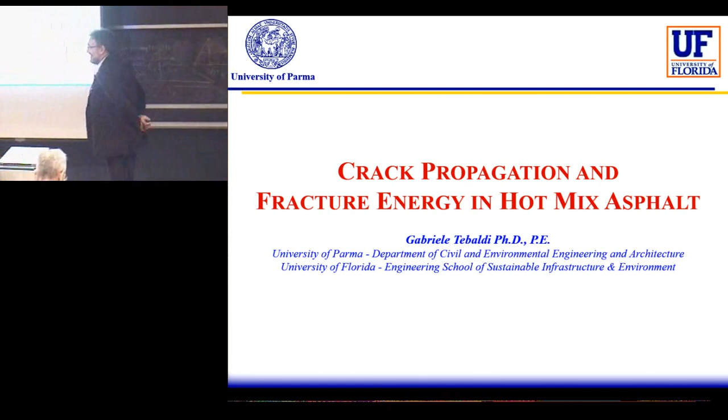Let me start from what, thank you, very thank you. I remember coming here, I was remembering myself 14 years ago, young, with a terrible English at the limit of the capability to be understood. And yeah, it's not a good English anymore, but I try to survive a little bit better. But it was a long journey from that day, and I have really to thank you for the chance that you gave me to start my international career. And yeah, it was always a piece of my heart. I would like to start by thanking you.

Okay, let me acknowledge all the people that were involved in this series of projects that was based on the application of the HMA Fracture Mechanics theory developed at the University of Florida, to understand crack initiation and crack propagation in asphalt mixture. First of all, the 2 persons that was behind the theory, Professor Reinaldo Roque and Professor Björn Birgisson, that is another piece of the connection in this small village that is the world. I met Björn in Florida, but I know that he came from here. Dr. Elena Romeo, my former PhD student that spent a lot of his time working on that. Professor Riccardo Roncella, the person behind the DIC method that we developed. Dr. Jian Zhu, Dr. Marco Isola, and my master student Simone Musetti, who were involved in several steps of this long work.

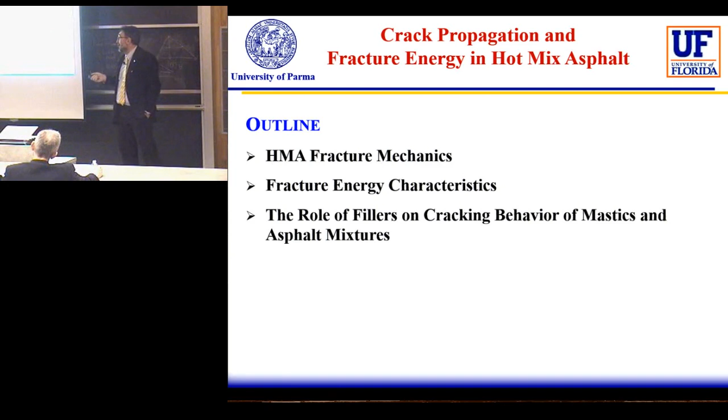Now, today, I will talk about the basic concept of the HMA Fracture Mechanics, a theory and theoretical approach defined by Roque and Sankar almost 20 years ago, and the work that we did to define the fracture energy characteristics from the experimental point of view in different parts of the material, and what is the role of the filler. Filler is one of the components of the skeleton of the aggregate part that composes the HMA, the mixture.

So let's start with the background of HMA fracture mechanics. The basic principle of this theory is the assumption that in asphalt mixtures, creep is damage, a way to dissipate energy and make damage in the material. The second basic principle is that a damage threshold exists. What does it mean? It means that if the strain energy stays below the energy threshold, no failure happens in the material. So micro cracks develop, but due to the property of healing that the material has, which is something not yet very well defined, it is a property due to the thermal susceptibility of the bitumen that allows the material to close and diffuse in the micro crack and realize a real healing effect.

So in the basic concept, if you are below the energy threshold, the healing is able to seal the micro crack. If the strain energy goes above the energy threshold, the healing is not able to heal the cracking, and we have damage - a not healable macro crack.

Following this approach, we can define the micro crack when we are below the threshold and the macro crack when we are above the threshold. We can see this as not visible and visible from another point of view.

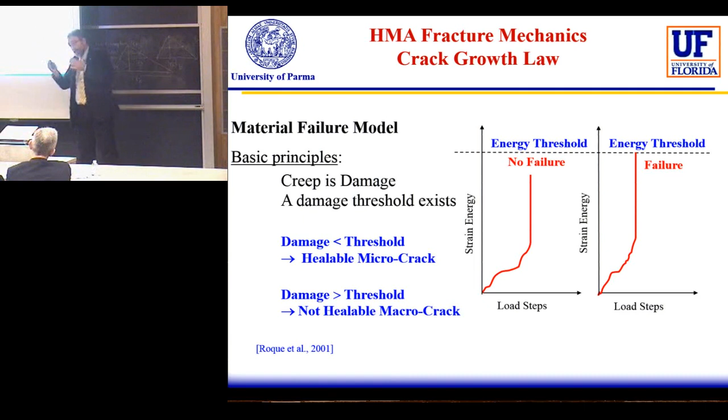So following this approach, we can define two different thresholds: one named dissipated creep strain energy, and one that is the total fracture energy. Dissipated creep strain energy is the energy dissipated by the creep of the material.

You apply load, the material starts to dissipate energy, and if the micro cracks make some kind of coalescence and go up, you have the first crack that appears in the material. If the energy is below, you have nothing, and the micro crack can be healed.

But if you have one pass, one load that involves the elastic part of the behavior of the material, you can go up over the other threshold, and again you can have a not healable crack.

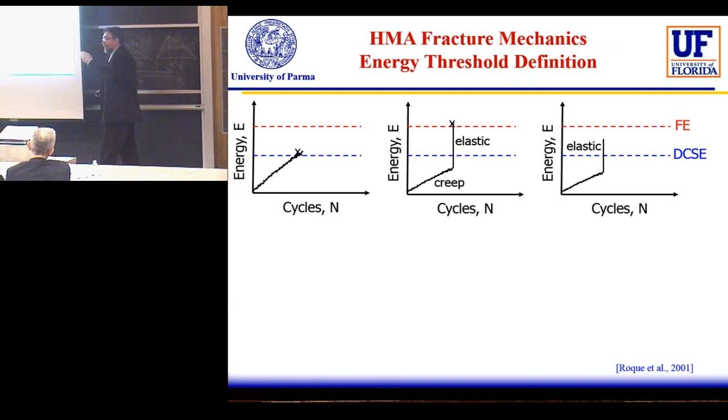But if you stay below the dissipated creep strain energy and below the total fracture energy, you have no cracking that appears. So you have some micro cracks, but the healing property of the material can seal, or let's say repair, the material.

So what we can do is, in the normal service life of the pavement, we have the potential for this: in one day you have damage that appears, but if the pavement is correctly designed and the strain energy is not too much, when the car and the load are not applied, the material has time to be healed. So we have healing, and the material starts again and again and again.

So if we are doing the right job in the design phase, we can keep the damage below the critical threshold.

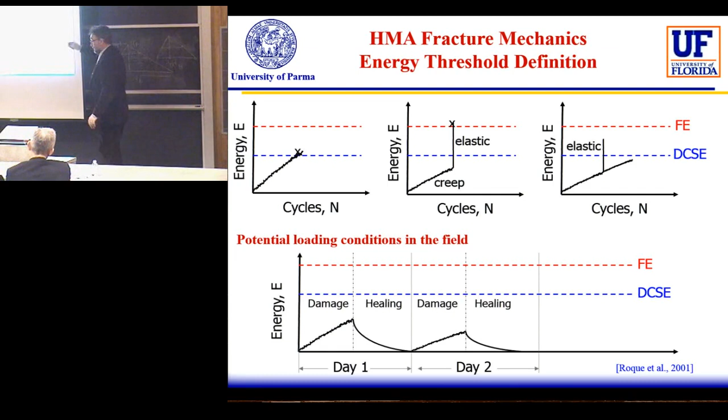So we can define, following what I just explained, the total fracture energy as the combination of the creep plus the elastic part of the energy - something like the area below the stress and strain curve, considering the stress and strain curve until the first fracture.

When the first fracture appears, it means that in that area of the material, the threshold was overcome. And from the fracture energy, using the elastic property, resilient modulus could be a way to estimate the elastic property, or some other prediction.

So in some way, if you are able to have an estimation of the elastic property, we can take out the elastic component in the stress and strain curve, and we can define the dissipated creep strain energy as this remaining area.

Everything was calculated following the Superpave IDT procedure, that is based on the IDT test, in a series of three different tests carried out on the same specimen, applying load and measuring vertical and horizontal deformation. We have the resilient modulus with cyclic load application, the creep with static constant load over time, and after that the strength, increasing the load until failure in a strain-controlled test.

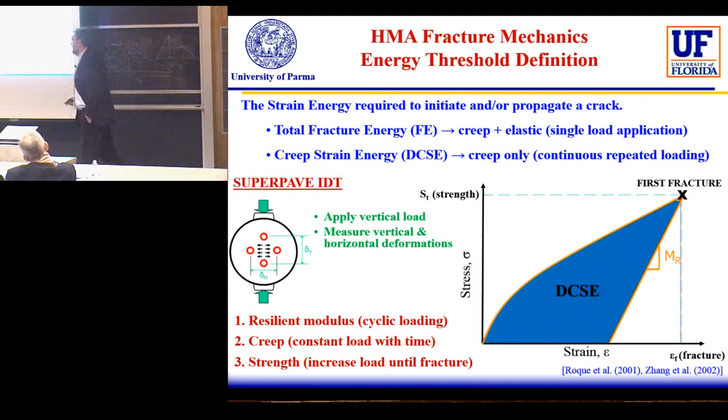Again, looking at the traditional approach of crack propagation, that is the Paris law, we can have an interpretation of this phenomenon from the point of view of HMA fracture mechanics, considering a propagation step by step in the material.

So if you have your material and somewhere in the material location the threshold is reached, you have the macro crack initiation. Again, from there starts some micro crack, and as soon as we reach the different threshold, we have a coalescence of the crack that develops the crack in the material.

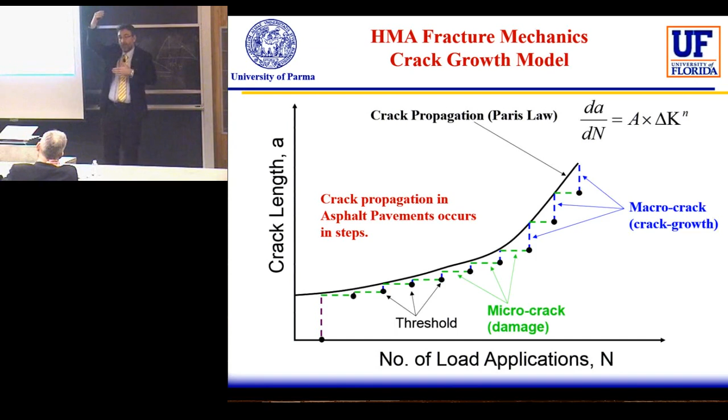The last topic: how was it possible to define the point where the first crack appeared? At that time, the DIC method was still not developed.

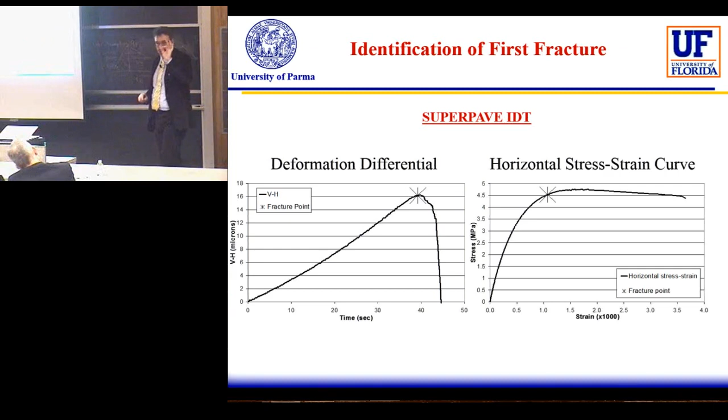Now let me go into the part where I was most involved, which is the definition of the different characteristics of the fracture energy. So what I call characteristics of the fracture energy is that we were able to verify that the fracture energy, defined following the HMA fracture mechanics, is constant in the material. We were able to calculate, thanks to the DIC approach, the fracture energy at different points where the crack started, and we found the same level of fracture energy at different points of the material.

We were able to show that this approach was independent from the specimen geometry and not affected by the polymer modification. For those not in the field of asphalt pavement, the bitumen, the black part of the asphalt, could be natural bitumen or the so-called polymer modified bitumen. This is a technique that allows adding polymer inside the bitumen to improve the elastic behavior and also the strength of the material.

So the hypothesis was that changing the internal property of the binder could change the general behavior of the material, and maybe the approach and basic hypothesis must be adapted to this internal change. We were able to show that the hypothesis was still valid even with the change in the fundamental property of the material.

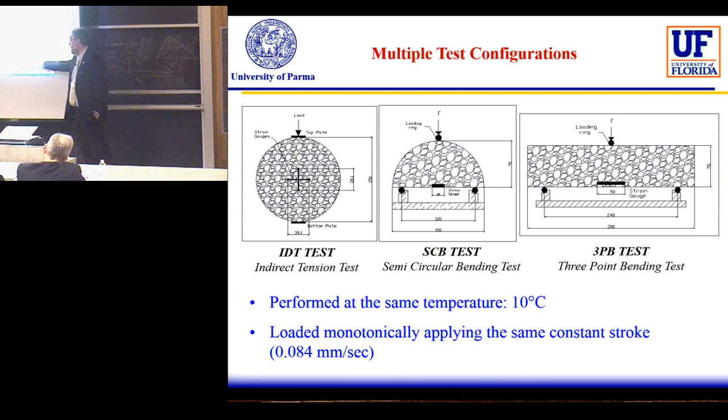And the load in all the tests was monotonically applied at the same constant stroke rate of 0.084 millimeters per second.

This was the information about the material: same aggregate type gradation, limestone, calcarenite, sand with 12.5 millimeter nominal maximum size to define the aggregate size, and three different asphalt binders - two different unmodified bitumens, and an SBS modified one, with 6.5% SBS linear polymer modified bitumen using one of the two unmodified bitumens as a base.

Why two unmodified, the so-called natural bitumens? Because bitumen is strongly dependent on the crude oil that is its origin. You probably never considered that bitumen is part of a big recycling operation in the world, because to produce gasoline, the residual part of the refinery plant is the bitumen.

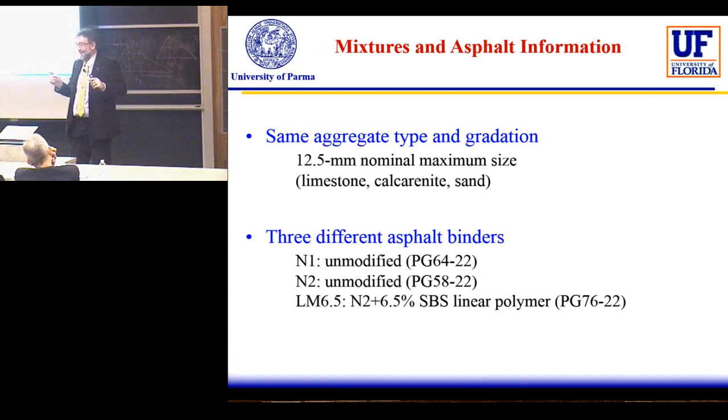So, to be more flexible in the evaluation, it was necessary to go beyond the traditional technique used to measure vertical and horizontal strain. The limitation of the strain gauge or clip gauge is that they don't provide a pointwise analysis - it's defined from the beginning where you are taking your measurement, and it's not possible to be flexible.

So if something happens where you measure, you are lucky; otherwise, you have to do the test another time with another hypothesis. And so it's not possible to do some kind of back analysis - to identify the critical point and do all your calculation at that specific critical point. It was, and still is, difficult with that technique to have a full field displacement and strain measurement in the specimen. So we have something local, just related to the point where the clip gauges are fixed.

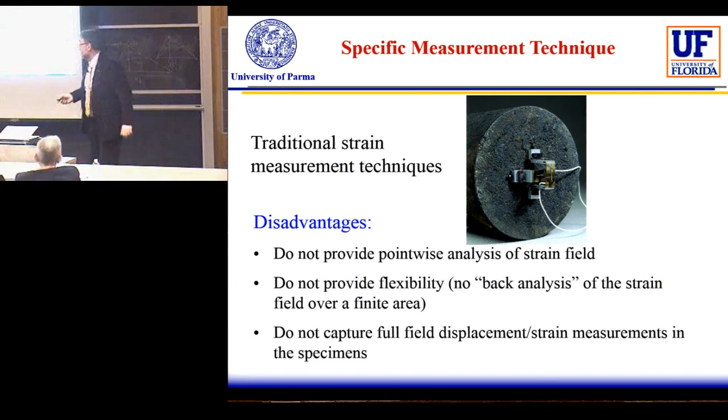For that purpose, a DIC method was specifically developed based on grayscale analysis. The basic concept is that one pixel with one specific level of grayscale, if the area of interest is sufficiently small, and if we find the same grayscale in two pictures, we can make the hypothesis that it's the same pixel that changed position. Of course, the more you increase the area, the higher the probability of finding similar grayscale, and the accuracy of your measurement goes down.

The system was very simple, based on a digital camera with a couple of lights in order to take out any kind of shadow. At the time it was not so easy to find cold light, because the risk is to increase the temperature of the surface and make some kind of alteration of the real property of the material.

And to have the right contrast, in this case a soft white water paint was used, and some random black dots in order to maximize the contrast in terms of the grayscale. If you have other material, not black like asphalt, maybe you can do without this particular technique.

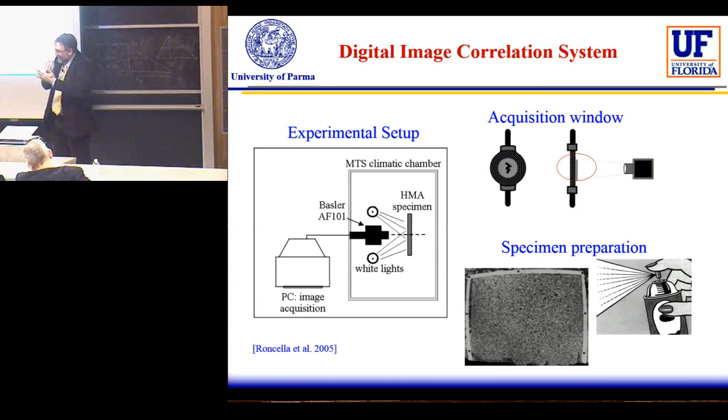Now it's simple, but I have to tell you a secret: at the very beginning we spent some months measuring the fracture energy of the paint, because we were too concerned about the fact that the paint has to be completely attached to the material, and we were not considering the strength of the paint itself. So we spent a lot of time with strange results, and we realized that at the end it was the fracture energy of the paint. But this was something that happened.

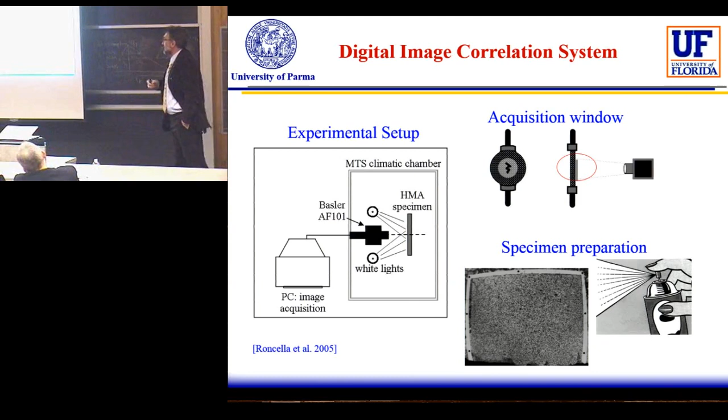So the first step was to verify the hypothesis that the HMA fracture mechanics, the fracture energy in agreement with HMA fracture mechanics, is constant in the material.

For that purpose it was fundamental to have the DIC, because we took pictures of the specimen during the test, and we made the calculation of the stress and strain curve and the fracture energy at the point where we know the crack will appear. Because we know where the crack appears, coming back in the picture, we can identify the point and make all the calculation.

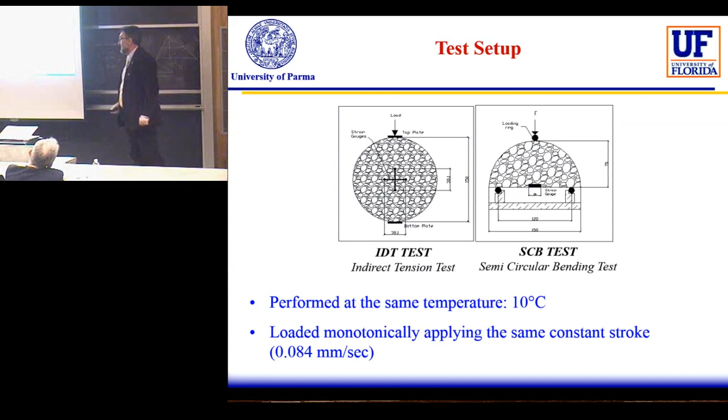For that purpose two different test setups were used: the IDT test setup and the semicircular bending beam test setup, again the same conditions that I showed before.

The strain analysis was made using the strain gauge in the back of the specimen and the DIC in the front. It was necessary at that time to have two different measurement techniques.

In particular, this was used as proof that the DIC method was giving us the right strain field, because we were at the very beginning - I'm talking about, I think, 2005. At that time the use of DIC was not common, so a lot of people were concerned about the real capability of that method to give us the strain field.

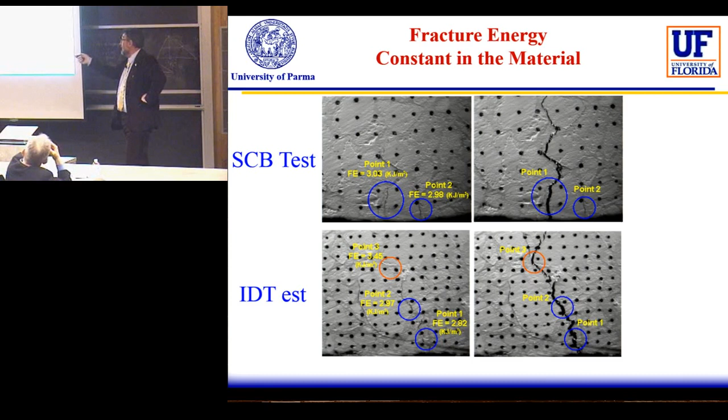And we found a very good agreement with the fracture energy calculated at the different points. So, using that result, we were able to show that it is a constant of the material, independent from the location of the crack and from the stress distribution behind the crack initiation.

The second step is to verify that fracture energy is independent of the specimen geometry, so independent of the stress field behind the crack initiation, and that it was not affected by this big change in the mechanical performance of the material, because bitumen is a viscoelastic material, but adding polymer, we increase a lot the elastic part, so we are changing the mechanical behavior.

So it was not so clear that the change was not affecting the hypothesis of the HMA fracture mechanics, and the other hypothesis that can be used to predict the crack initiation.

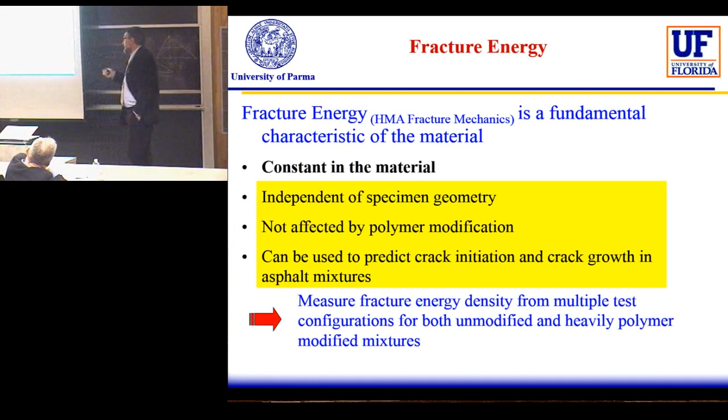Again, we did the test in different configurations for both kinds of bitumen, and here I will show you some of the results.

Again, double way: the strain gauge in the back and DIC in the front, and we found quite nice correlation in terms of first crack. Of course it was not in full agreement because we are looking at both sides - it's not a three-dimensional analysis - and something that can happen on one face is not exactly at the same time on the other, but considering that the thickness of the specimen is 5 centimeters, it's possible to assume that the time difference does not make a big change.

So what's happening on one face follows closely what's happening on the other one.

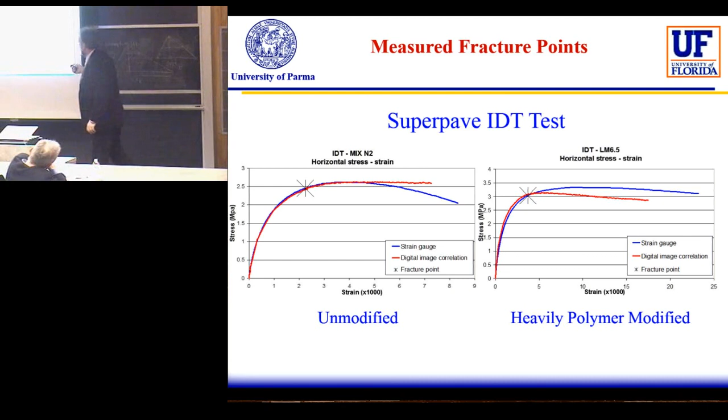But the fracture energy is more consistent as a parameter, constant for the material. We see that we are more or less at the same level for each material, and the difference among the different materials is strongly consistent. So the result in terms of IDT allows us to say that they are different, but not so big, like the difference between the highly modified bitumen and the natural one.

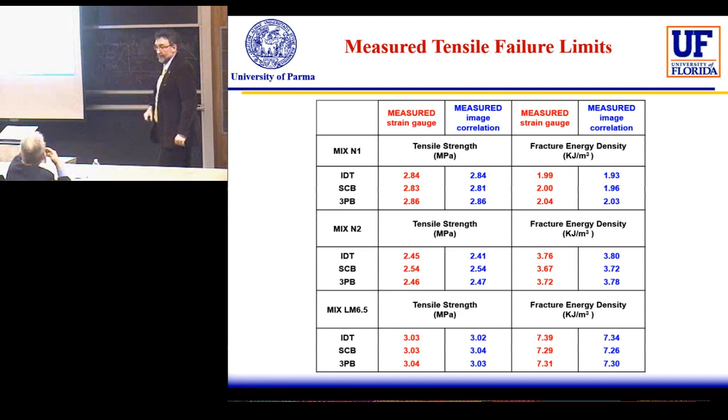Looking at the crack, this is just a collateral result - the crack path measured, and this is a representation. Here is the point where we calculate the fracture energy. You can see that even if the crack is not visible on the surface, the strain field is able to show that something is happening inside the material. And we know that because we are looking at the same point when the crack is visible.

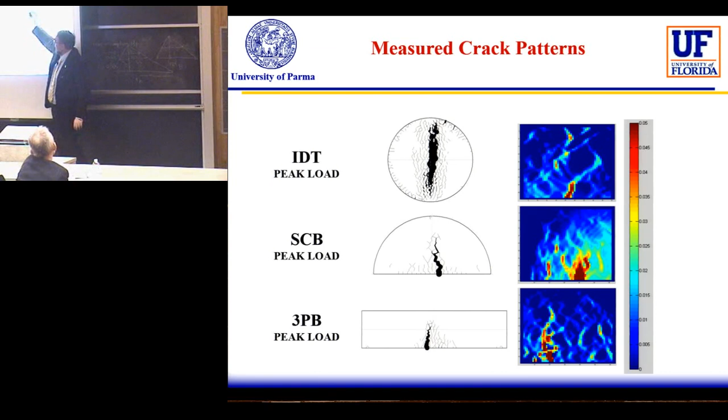At the peak, in this case the peak load, is at the peak of the stress and strain curve. So the process was exactly the opposite - we identified the point when the crack was visible, and in the analysis we went back until the first change in the strain field was visible in the material. This was the point that we selected as the first crack.

In conclusion of this part, we can say that using a rigorous interpretation of the test condition, it's possible to measure tensile failure limits for different test configurations, and we were able to say that the fracture energy is a fundamental property of the HMA material. In particular, this is the fracture energy calculated following the approach of HMA Fracture Mechanics, one of the approaches you can find in the literature. And the level of polymer modification does not affect the determination of the failure limits.

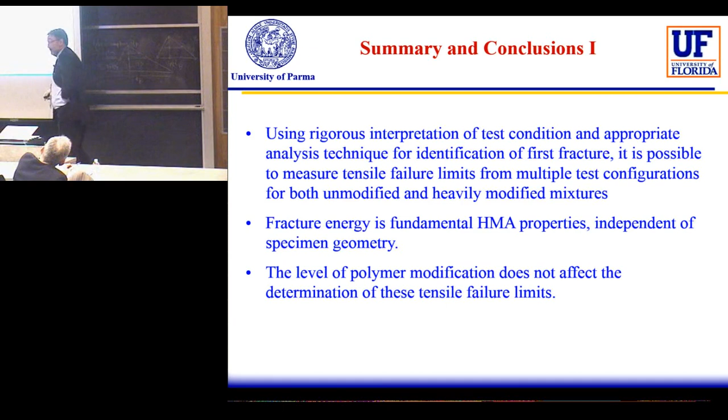Another step forward was to evaluate the role of the filler. For who is not familiar with asphalt material, I can show generally this grading curve - the distribution of the aggregate as a function of size. When we are talking about filler, we are talking about this part. Traditionally, the definition of filler is below 0.075 millimeters. The name filler came from the fact that the idea was to use this fine particle to fill the voids in the mixture.

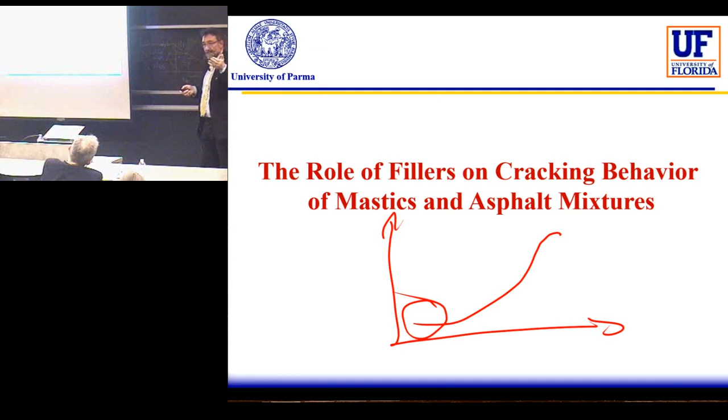But research in the last 20 years showed that it was not only a physical behavior, but the fundamental interaction between the small particle and bitumen is able to make a lot of difference in the behavior of the material depending on the mineral characteristics of the filler. In fact, 10 years ago the definition of active filler was introduced alongside mineral filler, when instead of limestone and other mineral materials, some people started to use fly ash, lime, cement, and different kinds, due to the fact that the interaction between this small particle - chemically and physically active - with the fundamental component of the bitumen, causes changes in the aging process and in the other properties of the material.

So the problem statement in this part of the research was that cracking, together with other properties, is a mastic-related distress. So the change in the mastics, or the change in the filler - we call mastics the combination between filler and bitumen - is something that can strongly modify the property of the material. In particular, we are looking at the fracture energy and the tensile limit. In the literature, it's clear from the work of several researchers that the effect of filler is based on a volumetric effect and a physico-chemical interaction between the filler and the asphalt binder.

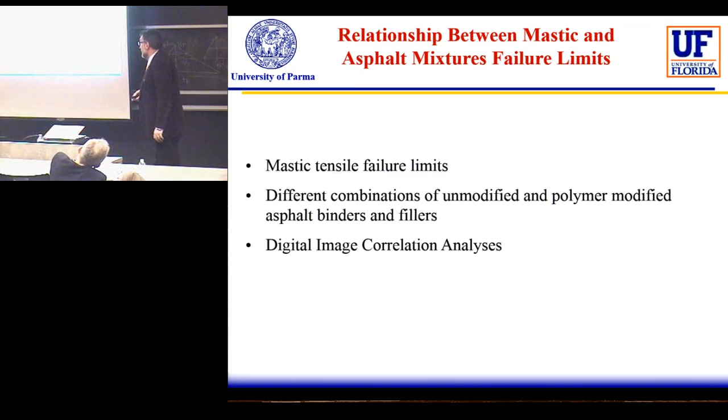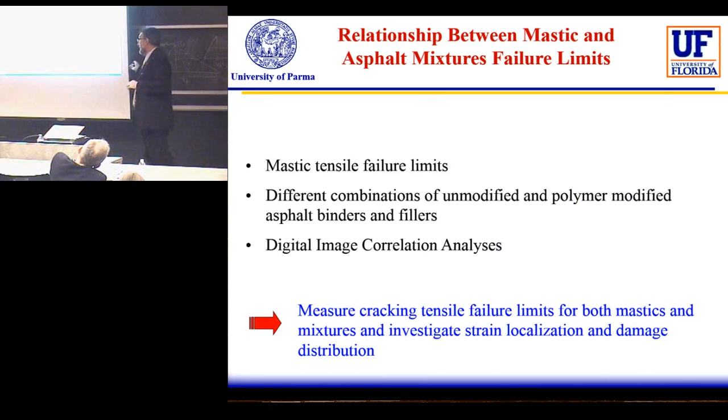So what we were looking for was to define the mastic tensile failure limit with different combinations of unmodified and polymer modified bitumen and different fillers. Again, we used digital image correlation for a more precise evaluation of the strain field in the material. We applied this and worked on both sides - tensile failure limit in mastics and tensile failure limit in the mixture. To do that, we decided to move to a very simple test configuration in order to have a very simple characterization of the stress field.

Starting the problem, we looked at the Superpave direct tension test, but we had problems with that kind of test because the test setup was not sufficiently big to allow the application of DIC. The stress distribution was not uniform considering the shape of the material. The gauge length was not compatible with DIC measurement, and the thickness of the specimen was too small to allow homogeneous results. It was a test designed only to measure force at failure, not to understand what's happening in the material during the loading phase.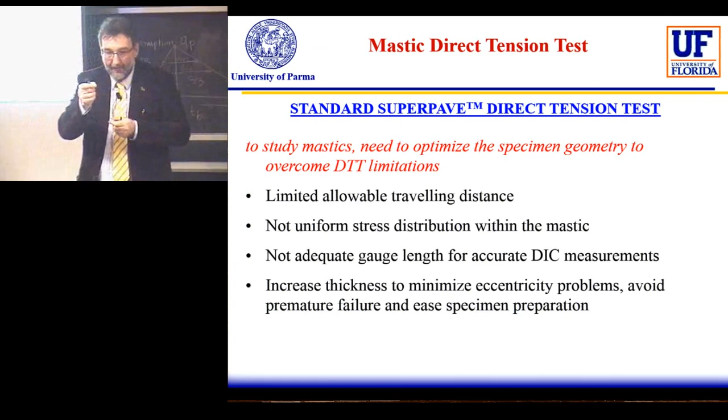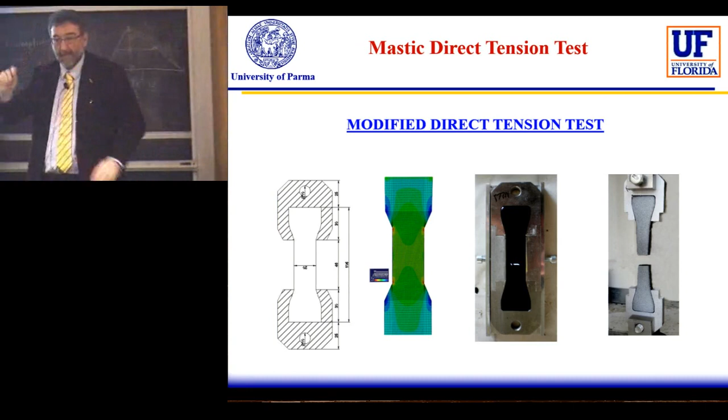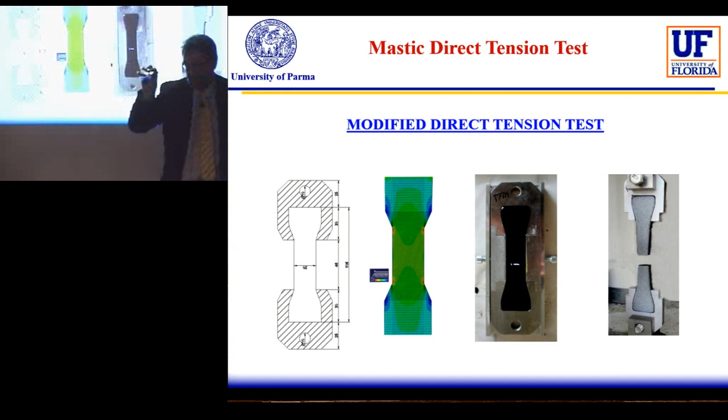So we changed the specimen shape mainly, considering the traditional dog bone. It was a combination of the Superpave tensile test and the dog bone shape that we designed. In particular, we designed that shape in order to avoid as much as possible points of stress concentration. The only one was here, and we spent a lot of time making it flat and removing any potential sharp points, avoiding any potential crack initiation point, in order to have the crack always occur here. This is important because with DIC we need a clear area where it's possible to point the camera and collect the picture. After several tries, we were able to identify that.

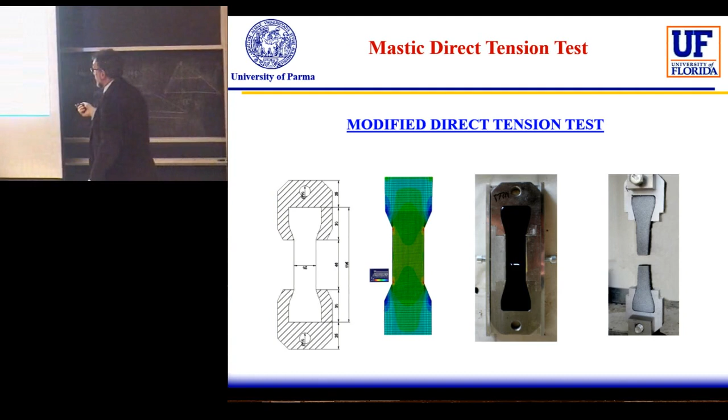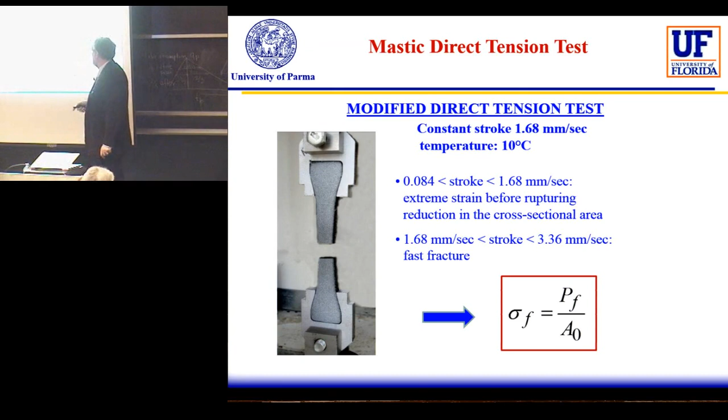Another important point was to define the load application speed, the stroke, because with a small velocity we had too much creep, too much deformation in the material, and it was not clear what area of the specimen to use to calculate the stress. But on the other side, increasing the speed too much, we had a very fast fracture without any possibility to get a reasonable sequence of pictures to do the back calculation. So after several trials, we identified 1.68 millimeters per second for our test.

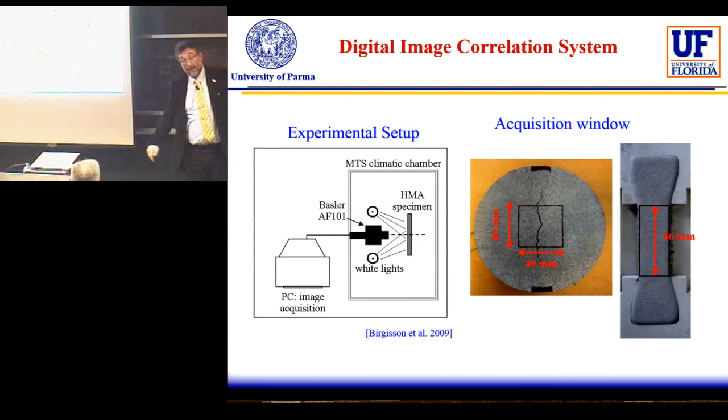And we defined the so-called area of interest in that area of the specimen, and this was the traditional one used in the DIC application on the indirect tensile test. Same setup.

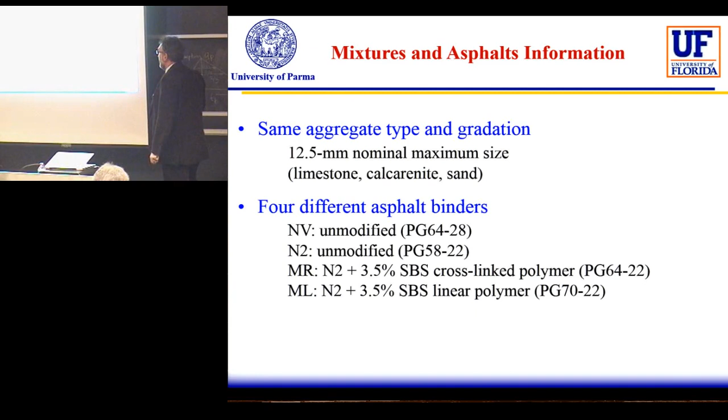To analyze the problem we used a mixture, the same mixture used in the other part of the research, and 4 different binders with different combinations of filler. We used limestone, and I have to tell you this is an artificial series of filler, not filler always used. In particular, clay is not a traditional filler for the material, but we used it to have something completely different from the mineralogical point of view. So the idea was to have limestone filler, an absolutely mineral inactive filler, one active filler that is hydrated lime, and clay. The idea was to have 4 completely different situations in terms of filler from the mineralogical point of view. Clay, I repeat, is something you never find in the technology, but it's an artificial way to do that.

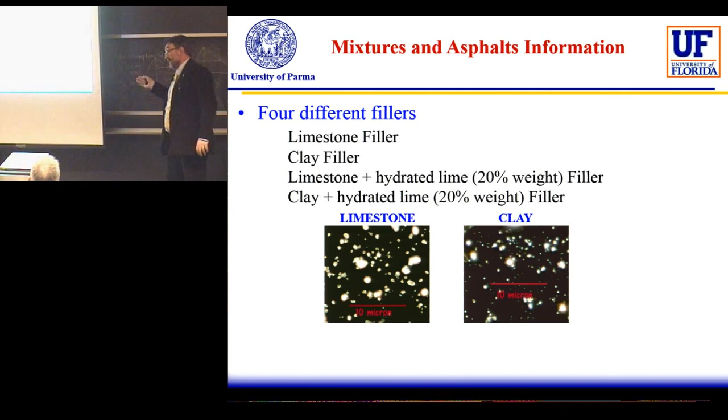At the electron microscope, we were able to see that already in the dispersion of the filler, something changed if we used filler based on limestone versus filler based on clay. We are still, honestly, not able to understand why this change happened, but something different appeared. So at the end we had 16 different mastics and 16 different mixtures. The same mastic was applied in the mixture.

The first series of results was in terms of tensile strength, and we started to see some differences, but we see that filler influences the modified mixture more. Where the polymer is, we have differences, but when we have no polymer, we have less difference as a function of the different filler applied.

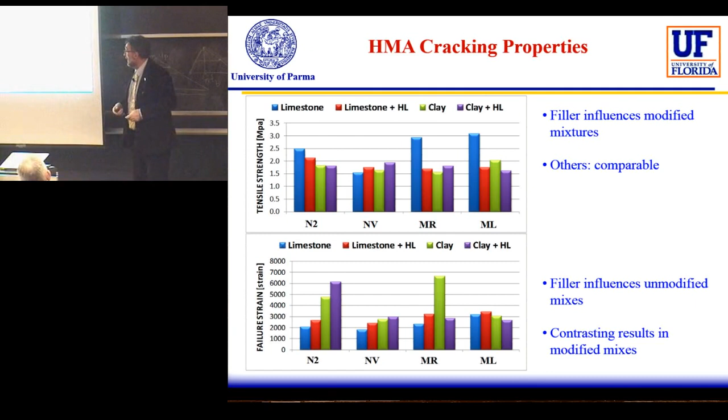In terms of failure strain, we saw that filler influences the unmodified mixture, and for unmodified mixtures, in terms of modified mixture we have contrasting results. We are not able to clearly identify a pattern in the behavior of the material. With fracture energy, something is more clear, but again it's difficult to find a clear pattern. The clear message is that the filler definitely makes a difference. So changing the filler, we have different behavior of the material.

So it's something strongly related to the physicochemical effect that the filler has with the bitumen, because we are changing nothing in terms of the internal structure of the material.

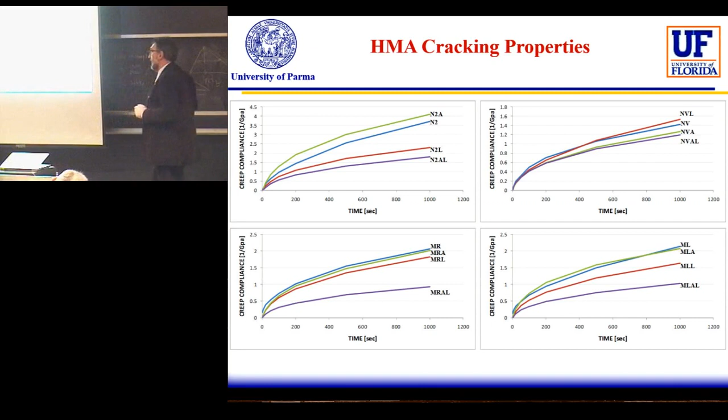Looking at the creep compliance of the different mixtures as a function of the combination of filler and binder, we have different mechanical responses. The most evident change is in the crack pattern of the different material. We can clearly see in the IDT mixture that when we have limestone and clay, we have different crack patterns that appear. I show one example, but believe me, we found similar behavior and similar differences in all the mixtures.

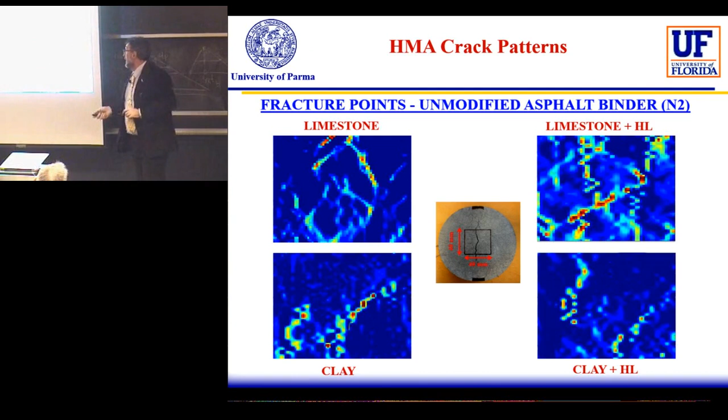Adding an active filler, hydrated lime, to the same one, we have more difference in one case than in the other. So the hydrated lime combined with clay does not have the same effect on the crack pattern as hydrated lime combined with limestone. Here is another difference made by the different bitumen.

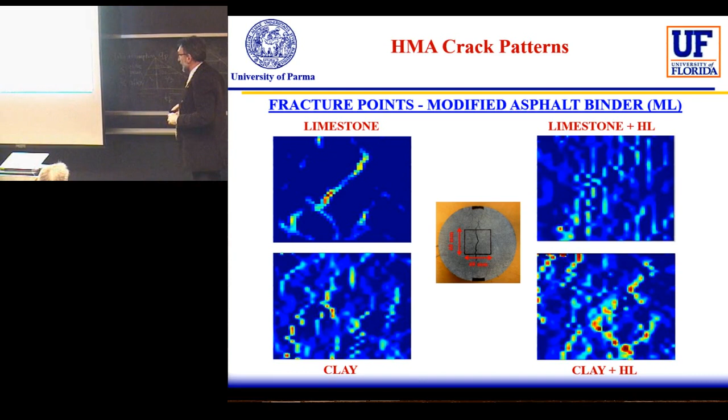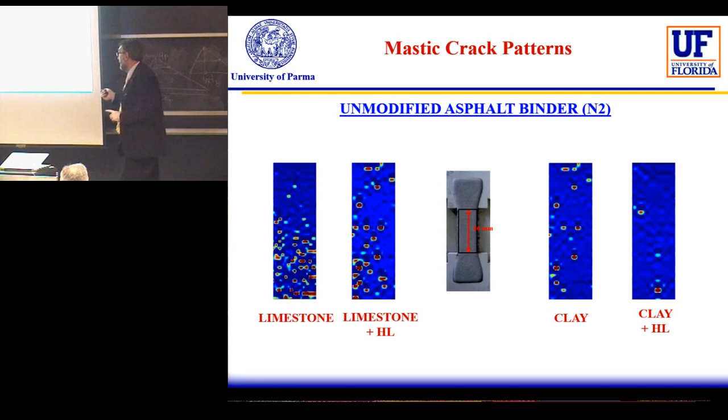And again, if we look at the crack pattern, we clearly see different behavior as a function of the different mineralogical property of the filler, affected by the presence or absence of hydrated lime. This is something only seen in the mastics. One of the nice results of that research is this.

So, in conclusion, HMA cracking properties are affected by the filler nature. So the message sent to the people who design the mixture is that filler is not something you buy on the market by choosing the cheapest one, but is something that needs to be considered due to the effect it has on the behavior.

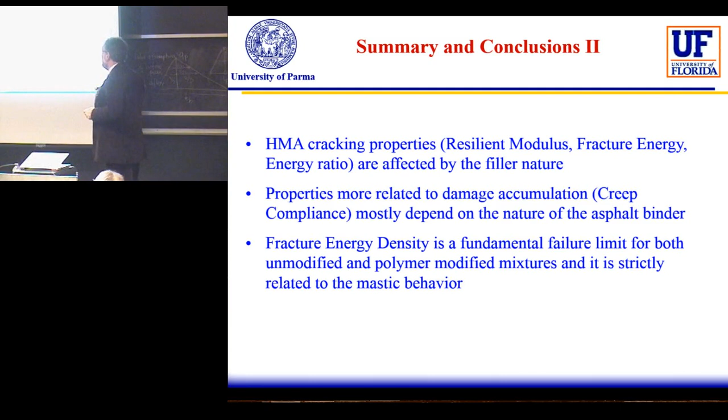And the property seems more related to damage accumulation, and as a function of the nature of the asphalt binder. And again, we have the fact that the fracture energy density is fundamental—it can be considered, this is a strong affirmation, let's say, a fundamental failure limit for both unmodified and polymer modified mixtures, and strictly related to the mastic behavior.

Some consideration here on the fact that the nature of filler has a great influence on the mastic mixture damage distribution, and we can synthesize that modified binder plus clay filler has a different strain localization. In one case we have a large area of damage, something more distributed. Unmodified bitumen plus limestone has highly distributed damage, and modified binder plus limestone has more strain concentration around the fracture point.

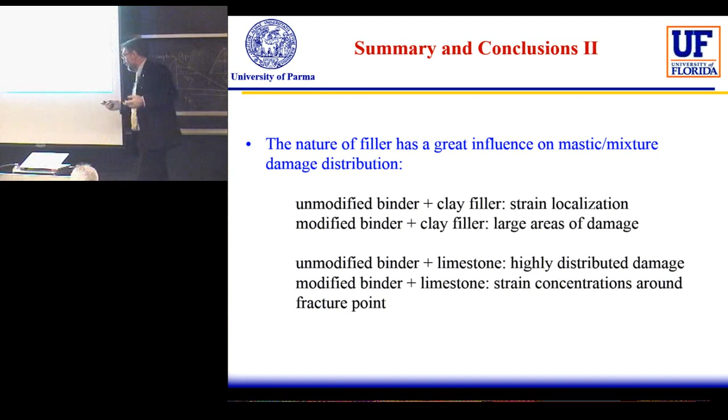So, I hope my presentation was enjoyable and not too tiring, and if you have any questions, I will be very happy to answer.

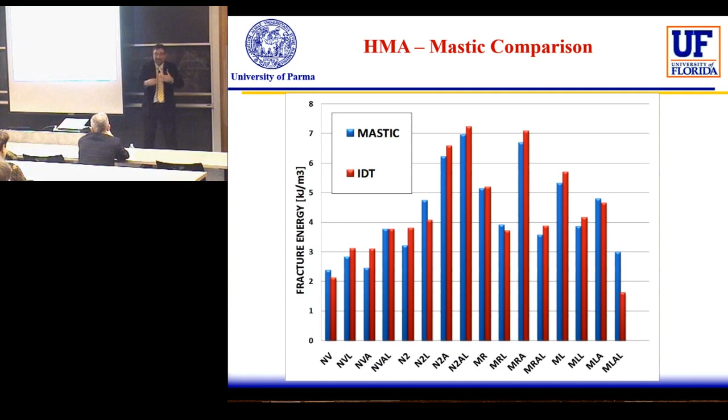The definition given in the HMA was due to the fact that the integral was defined as fracture density. Honestly, I was only taking what other people did, and I applied it. I cannot be more precise because I really don't know exactly what is behind this approach. I arrived in the research after. I am the experimental guy. Sorry for that, but I have my opinion, it's based on the work of other people, and I don't like to go too much in depth.

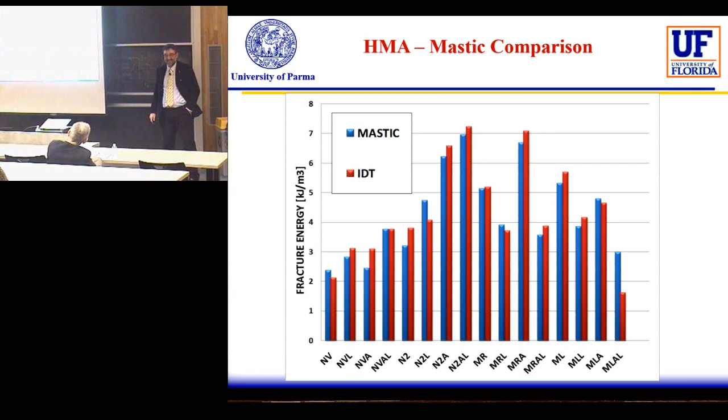And to contact your former student, Professor Birgisson. Yes.

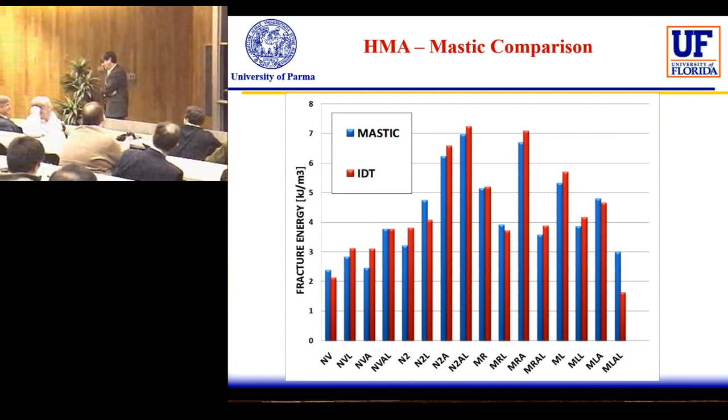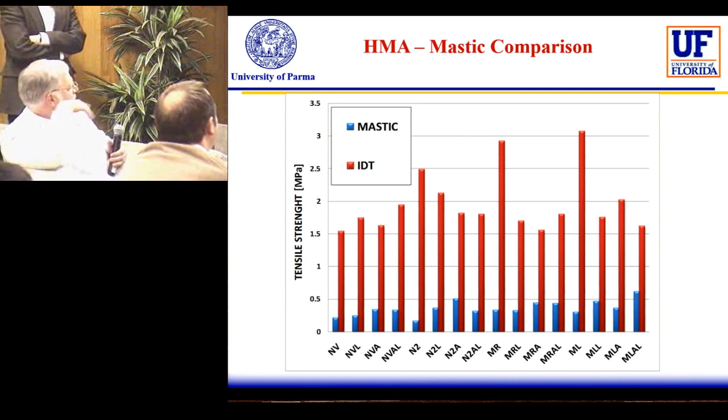You showed a lot of pretty graphs, but you never said how many times, what sort of replication level are you looking at for your experiments? You had 16 different cases, but for example, on that plot, how many times were each of those replicated?

Generally 5 specimens for each one. The idea was to have at least 3 consistent results, and generally based on at least 5 tests, taking the 3 closest. This was generally the replication. But it would need on the order of 100 tests if somebody wanted to replicate this with different combinations of materials.

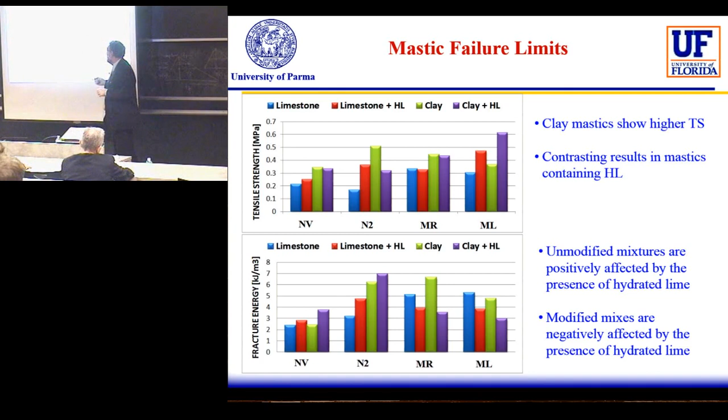Honestly, generally I suggest not less than 3 for each material. We used 5, some cases more, particularly at the beginning, because we had not so much experience to say that this was noise and not some problem. So in some cases we arrived at 7 or 8 tests for each one. With experience we were able to finalize at 5.

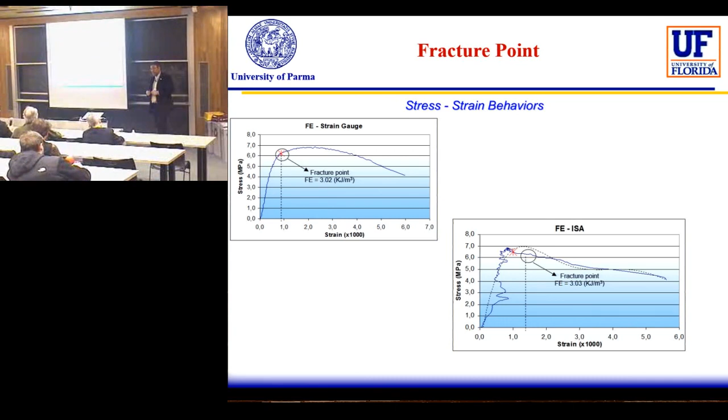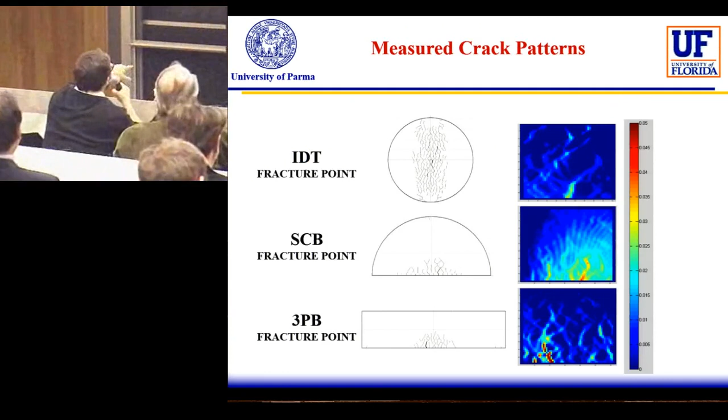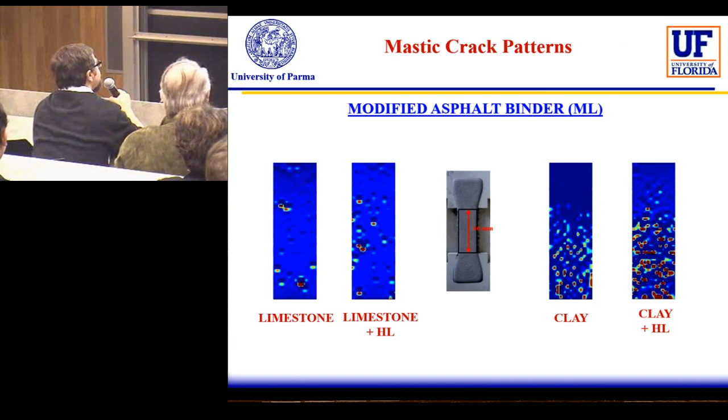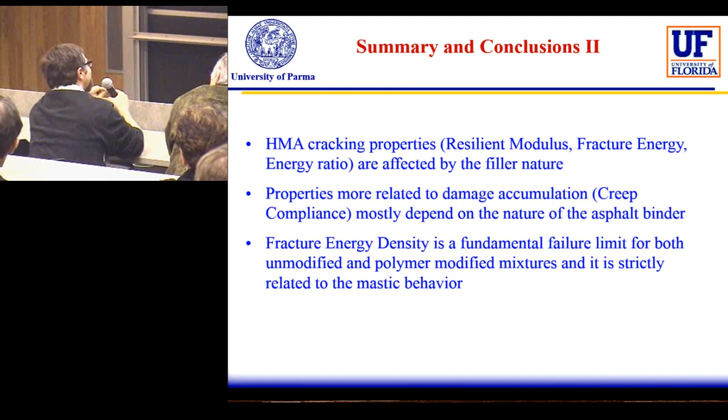My question is, if having the same rate of loading, you are taking the time-dependent effect out of the picture. I understand your point, that's question number one. The second, related, in the concrete area, especially in Russia in the 1970s, people related damage to creep, talking about relating damage to nonlinear creep. The assumption is if your creep behavior is linear, there shouldn't be damage. As soon as you start getting nonlinearity, that's like cracking, that causes the damage. So would you comment on this?

I understand the point about the time dependence, I think that is a point that can be analyzed and discussed. In that case the assumption was that the application was a damage in terms that a dissipation of energy appears. So I can tell you, due to the fact that if we apply constant application of load, it leads the material to have damage.

The way I can tell you is because we are saying that there is non-linear. The basic hypothesis is that if we apply something and we have some kind of dissipation of energy, that starts and leads to do something in the material, so we have some damage. The concept is that this kind of damage can be affected by healing. This is the difference - this is a damage that is not unhealable.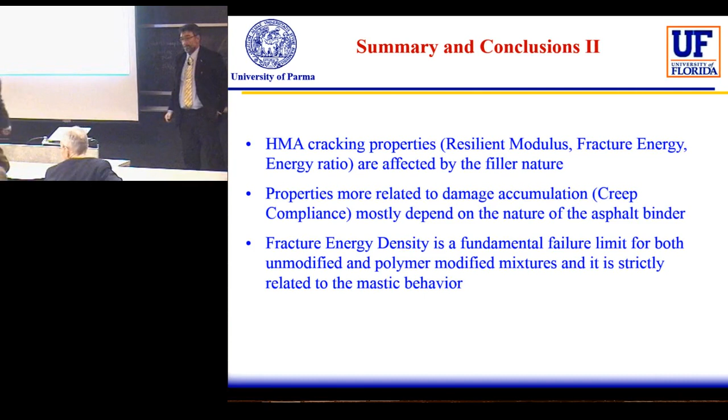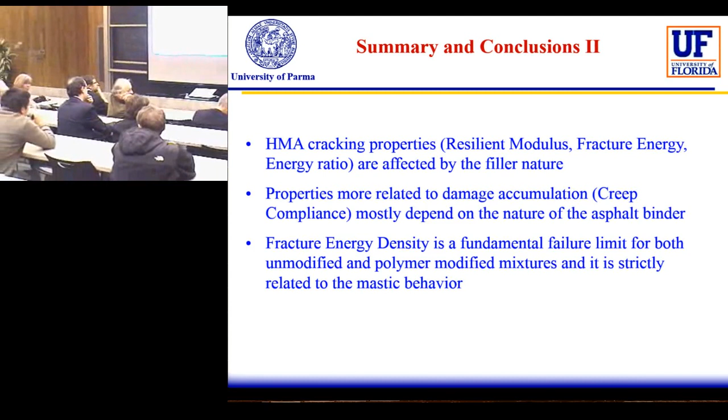Following the previous question, so when you define fracture energy density, I think this quantity will depend on specimen size, because the stress-strain curve will depend on specimen size. Larger specimens get more post-peak response, so the idea of the first fracture is to try to avoid the problem of specimen size, to find the first damage in the material. This is the concept, to avoid the problem, because if we have a big specimen, the stress distribution is related to the specimen.

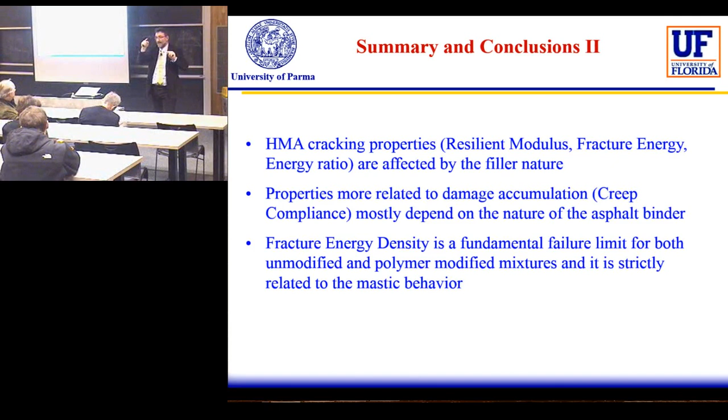The idea is to analyze the material locally, to consider the material locally and have the first fracture, considering the material already damaged even if the general specimen is still efficient, because we are not yet at the peak of the stress-strain curve. In my opinion, if we reach the peak of the stress and strain curve, this is the failure of the specimen. Generally the first crack appears somewhere before that point on the curve.

So when we have the first coalescence of when the micro crack appears, we have the first crack. The idea is to try to avoid the problem, to take the first. But is this the conventional definition of fracture energy? Fracture energy is the energy flux for propagation of a macro crack. It's not a micro crack.

Please, can you repeat? When you talk about the so-called first crack, I would say that if you start to look at the stress strain curves deviating from the linear part, to me that is a micro crack. If you calculate the energy based on that, basically you're measuring energy caused by the micro crack. The fracture energy we are talking about in fracture mechanics is mainly associated with macro crack propagation.

The concept is that if you go above the threshold, you cannot go back, so you cannot heal. The material, the crack, can disappear below it. So you can have healing on that. If you are above, you cannot have healing.

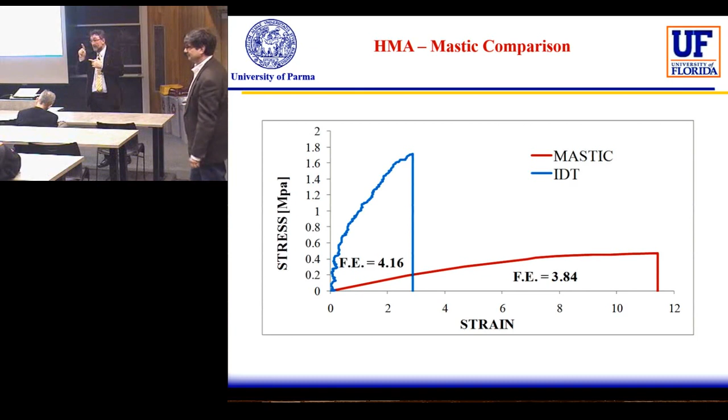So this is something that changed, the healing concept. Because if you have a material like steel or something, you have no healing. As soon as you are over, it's done. This kind of material, due to the nature of the bitumen, you can heal. This is the difference.

Because if you cannot heal, we are on the same page. But if you have a crack that can be healed, it's something that can go back, some kind of reversible - if it's possible to use the concept of reversible, because it's not really reversible, it's that the material has a small level of damage, and the fluid nature of bitumen can come back and seal. It's not the crack that disappears, it's the crack that is closed. So if we go up, we reach a level of damage that doesn't allow the nature of the bitumen to heal. This is the difference between microcrack and...

Okay, we have time for one more question.

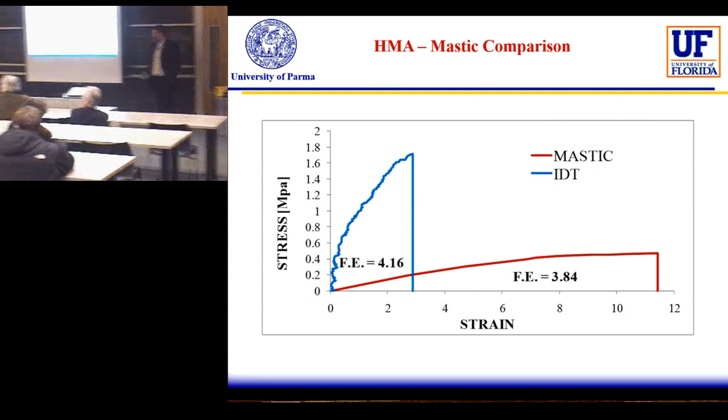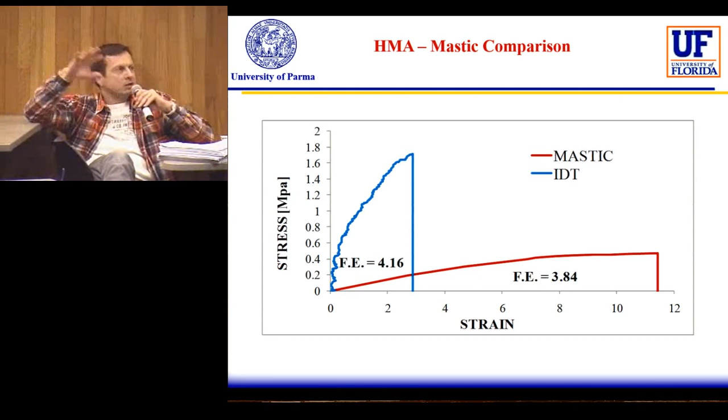I'm just still trying to figure out what this filler effect is. Is it a particle size issue? Is it a chemistry issue? Clay is not just clay, there's kaolinite, there's all kinds of clay. How do you characterize these fillers? Do you have particle size distributions? Did you take one kind of chemistry and vary the particle size and particle size distribution, or take the same size and vary the chemistry? I'm trying to figure out what is going on with this stuff.

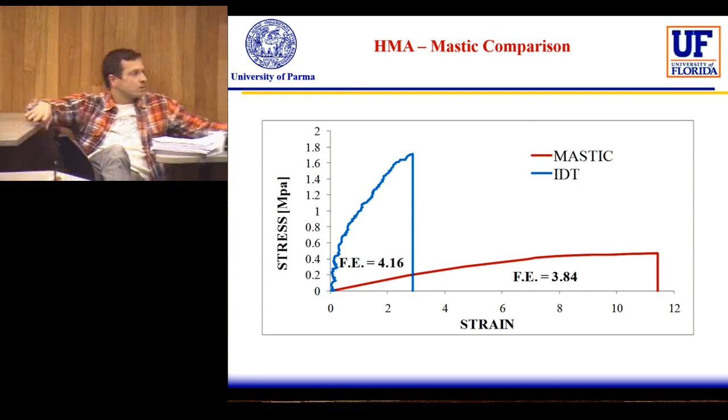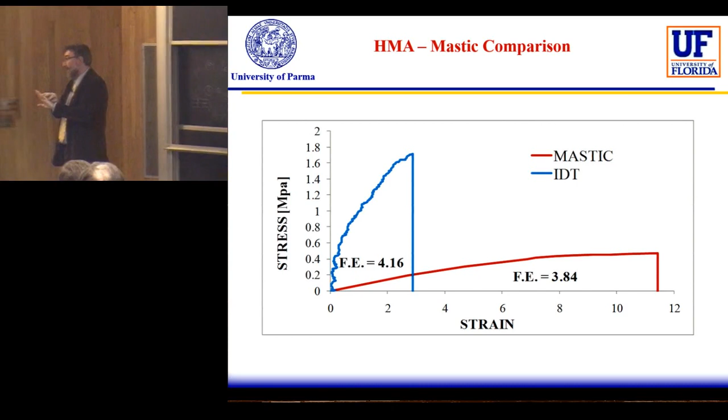Generally, what we did here is to change the physicochemical characteristics. One of the hypotheses is it's an unclear situation, we have different theories around at that moment. For example, in the case of hydrated lime, one hypothesis behind the different behavior is that due to the high surface area of the hydrated lime, there's interaction with the oil - bitumen is traditionally considered composed of oil, asphaltene, and the resin family. The oil, the so-called volatile part of the material, is the main actor in the so-called aging. If you have bitumen, when the volatile part goes out, you have a material that becomes more stiff, more brittle.

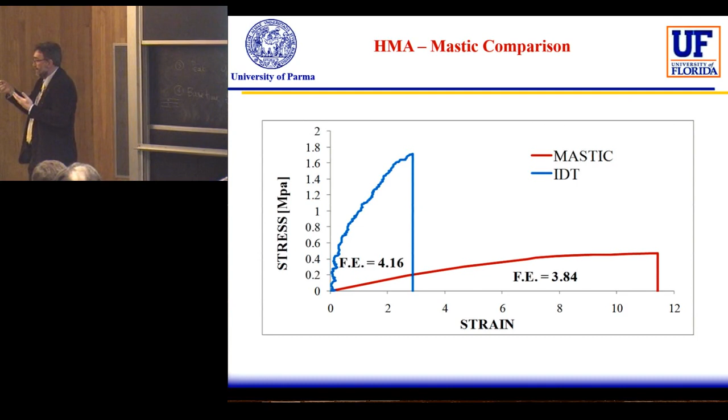A change in that behavior was observed, and the hypothesis was that the lime works as a sponge and attracts the bitumen inside, making it different and delaying the volatilization. Another explanation is that the surface of the different material can be different and can interact in a different way with this heterogeneous material, having some kind of physicochemical reaction. Those are the hypotheses behind that.

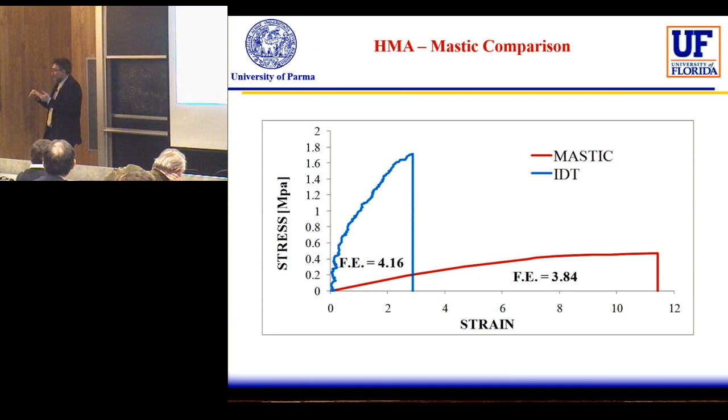So it probably is - I think there's also an effect of size, because we define filler as below 0.075. But even there, we can have different size distributions. So probably it's a size effect - the size, surface, and how chemically physically active it is. This is a combination of the interactions. The fact is that because the filler is very fine, the interaction is higher with the components of the bitumen. So we can have different changes - it's a real change in the physical behavior.